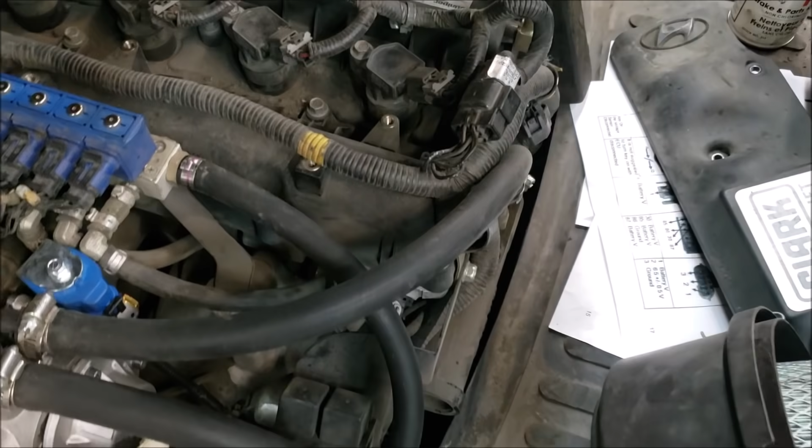Okay, we got a Clark with the Hyundai engine, 2.4, I think, and it has a Juniper system. Problem is, it's rough when it's running. Let me start it up. Sometimes it's hard to start. Okay, now you can hear it. It's hunting.

As you can see, somebody already replaced this. From what I gather, they said it wouldn't even start the first time. They replaced it, and now it's running like this. See, you rev it up, it has a bit of hesitation, it's almost about to die. Alright, so we're going to be checking that.

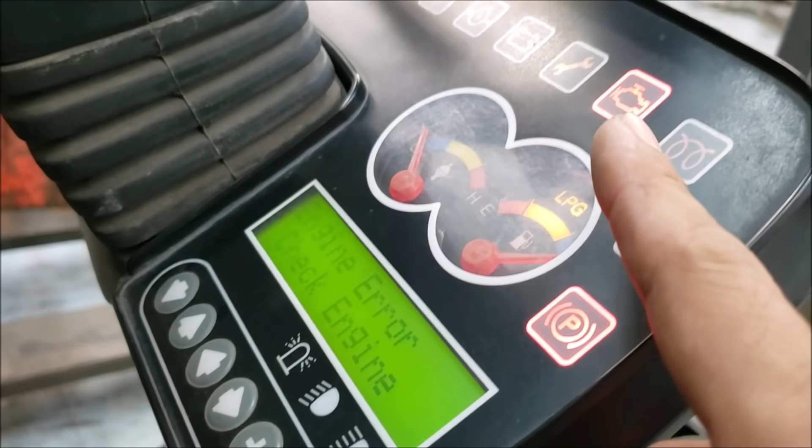We have the check engine light on. Alright, I already got the code from it. I will show you later how to get the code from this type of system. But the code that I got was 0087 and 0192, both pertaining to the pressure sensor for the rail. So what we're gonna do right now is check the response of the rail pressure sensor. We know we got propane coming in, and the injectors are working, at least, because it starts. Whether they're working good or not is still a question, but we are starting with the rail pressure sensor because that is the code that we got.

Okay, so before we do some actual testing on the sensor, let's try to understand what the code means and how the sensor works. Two codes were present: 0087 and 0192. 87 is a fuel rail system pressure too low, and 0192 is the pressure sensor circuit low.

For the threshold for 0087, once the pressure drops to 1700 millibars or lower, that DTC will be set. Now 0192 is when the voltage received by the ECM from that sensor has gone too low, then that DTC will be set. What's important to notice is the default strategy for the ECM when it encounters a P0192 - as you can see, the default is to assume a value of 1700 millibars. Now, of course, this is not going to be adequate for every scenario, and that's why I think we are having a problem at a snap throttle.

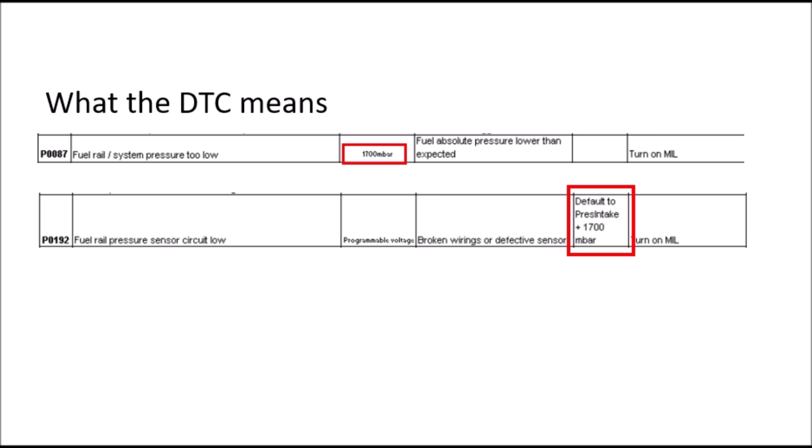Okay, so up next, we're going to be looking at the pressure sensor itself and how it works. So this is the sensor that was used in the fuel rail. It's a Sensata sensor that incorporates a pressure sensor and also a temperature sensor, but we would only be talking about the pressure sensor inside. This sensor is a 150 psi absolute pressure transducer sensor.

The output is ratiometric from 0.5 to 4.5 volts. This sensor is meant to read 0.5 volts at a pressure of 10 psi absolute, and 4.5 volts at 150 psi absolute. Now, from the book for this truck, the specification says it should be 1800 millibars minimum at key on, so that would roughly be 26.1 psi absolute, or using the graph, the voltage would be approximately between 0.8 to 0.9 volts at key on.

And then of course at a higher RPM, it's supposed to follow the pressure sensor reading from the map sensor. So at a higher load, that voltage or pressure reading should increase from that sensor.

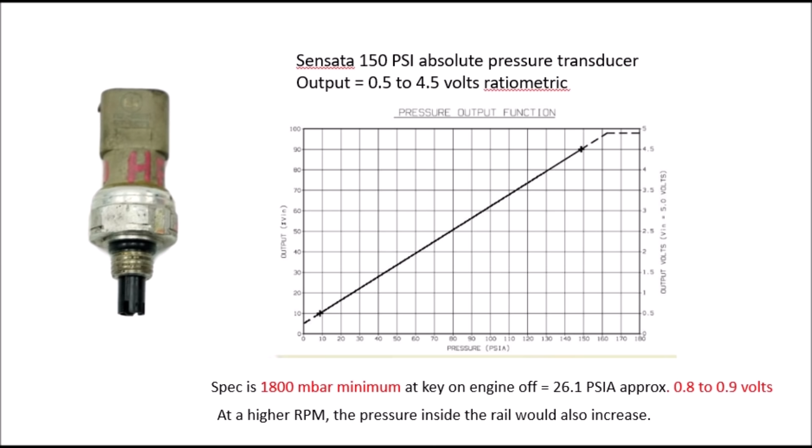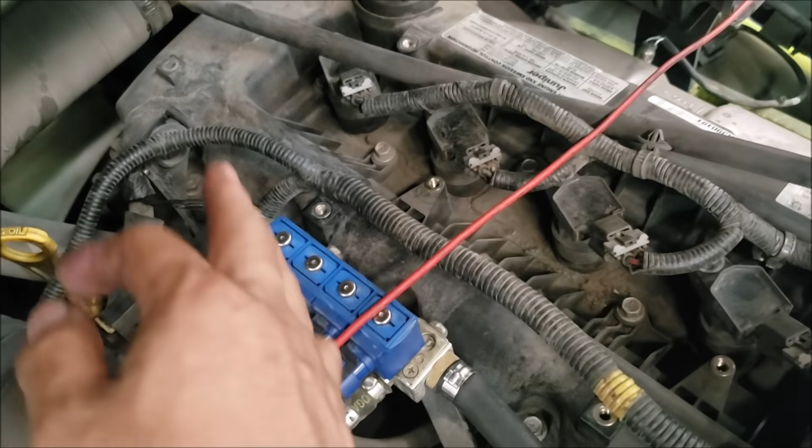Okay, so I have my channel B hooked up to the signal in from the pressure sensor. I wanted to pin it on the computer side. So I know the pressure sensor is here, but I'd rather take it from the computer, so I know it's reaching the computer. It's easy enough to get at it anyway, it's just on the back of that panel.

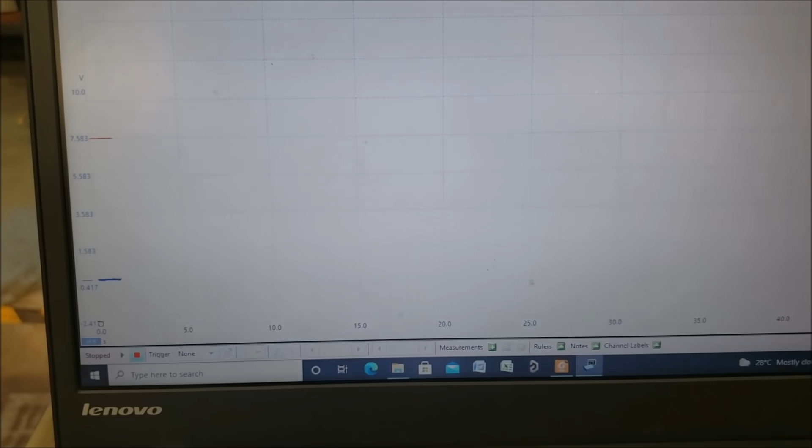Alright, and then my channel A is hooked up to my map sensor, which is right here in the manifold. Right now, channel A, channel B is already set up. So I have it set up at 5 seconds per division. It's a slow signal anyway. So let's try to run this. Okay, it's running. Let's crank it.

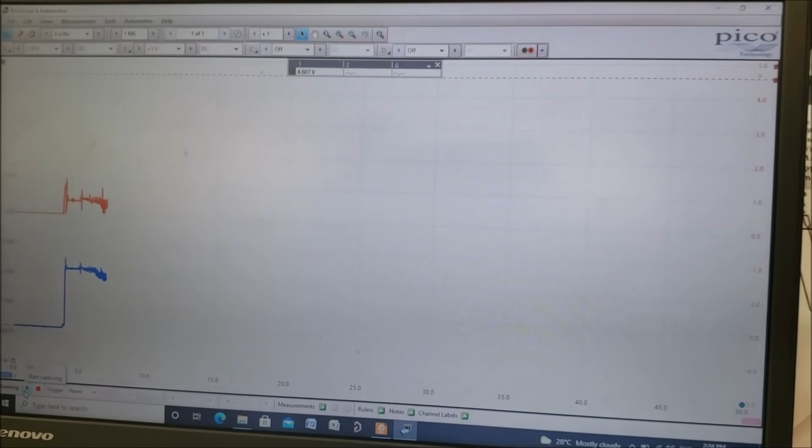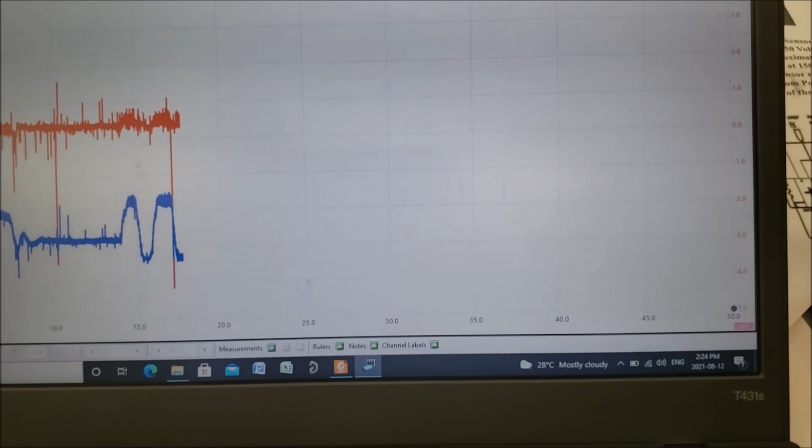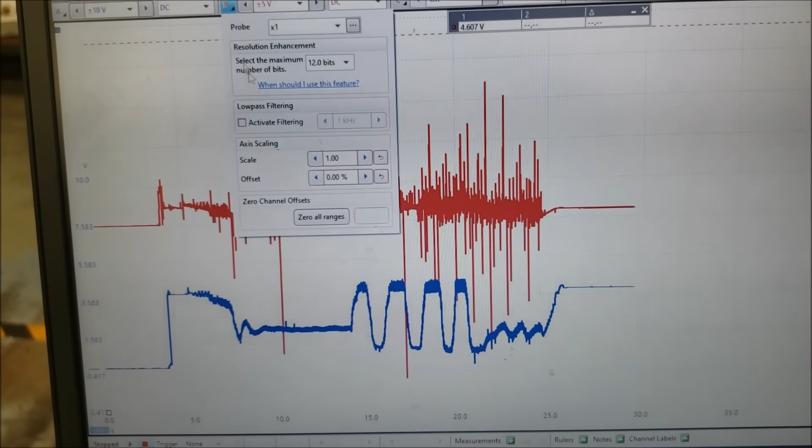Yeah, that was rough. Okay, and we're going to key off. Stop the capture, and we're gonna clean it up a bit. I'm gonna put in our filters here just to clean it up a bit so you can see that signal a bit better.

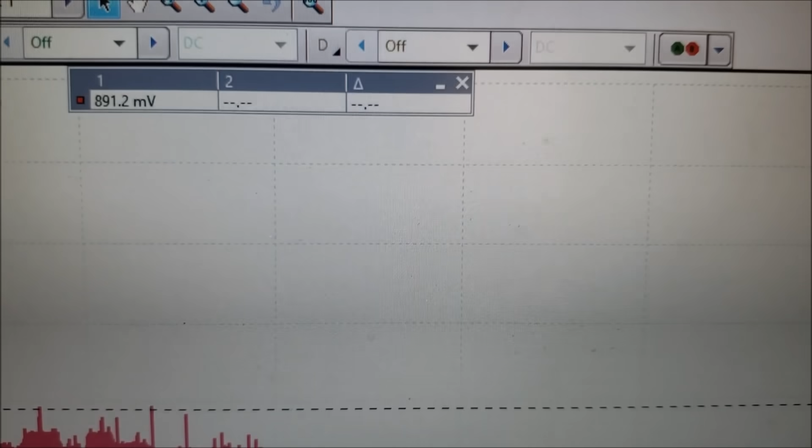So as you can see, at the moment of key on, let's bring down this. At the moment of key on, the reading was close to 0.96, somewhere not like 0.89, which is close to the specs in the book. But after a brief moment, it went down to about 453, which is already lower than the specs.

And then once we cranked it and started it, it never went above that. It does follow, but it never went to the proper readings. All right, so I know the wiring is good because it's reaching the computer. We know that the power is good, already checked it. Powers and grounds, already checked that, it's good.

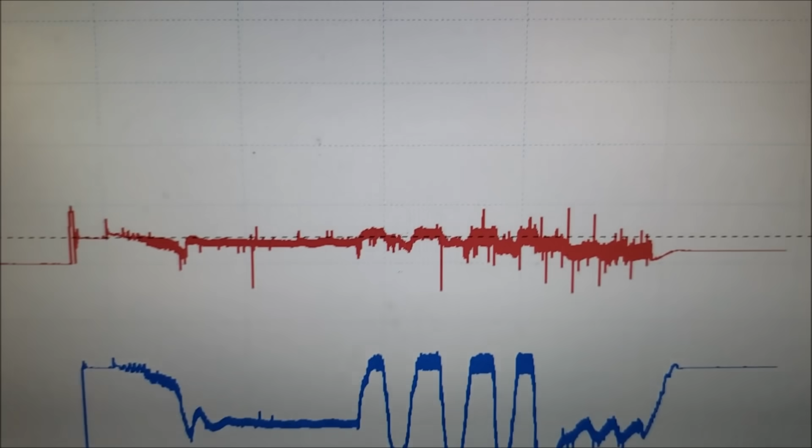So to me, it's looking like it is a pressure sensor. It's not reading right. Looking at this, if nobody replaced it with a brand new regulator, then I would be thinking, okay, maybe the regulator is not supplying enough pressure or is not regulating properly. But at this point, it's brand new, so I'm gonna think that it is doing its job. So we have fuel, but basically not enough, maybe.

But I am gonna try to replace that sensor and see what happens. I don't think it's gonna be in the fuel rail, I don't think it's gonna be the injectors. Basing on how it was responding to that surge of pressure and then ultimately just dropping down right away - if it was a leak, maybe a leak in the injector or whatever that's dropping the pressure, you wouldn't see a drop that is right away. It's steady and then drops right away at that instant.

I would think more that if there was a leak somewhere here or outside, then it would be a slow drop in the readings of that sensor. That's why I'm thinking more that it's going to be that pressure sensor that is at fault here.

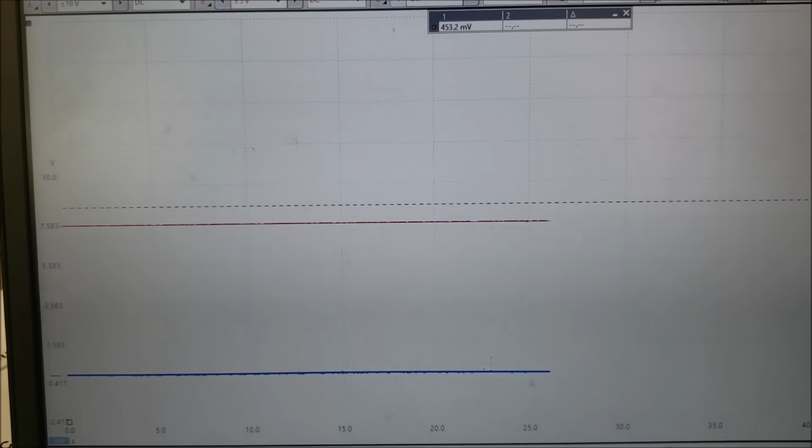Okay, so got the new sensor in. That was the old sensor. All right, new sensor in. The oscilloscope is hooked up the same way. All right, it's already running. Let me stop this for a sec so we can go back to the first one. Okay, same setup. Okay, let's try to key on first.

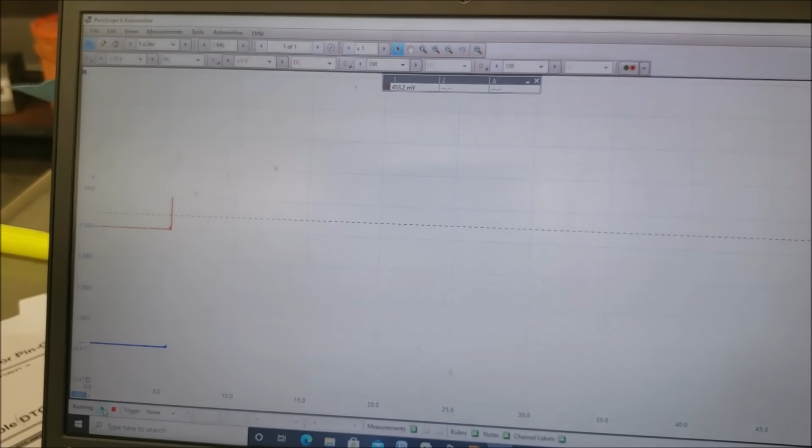Okay, so that's a big difference off the bat. So right now at key on, just a key on, see, it's holding steady. It's at 1.3414 something, so that's good.

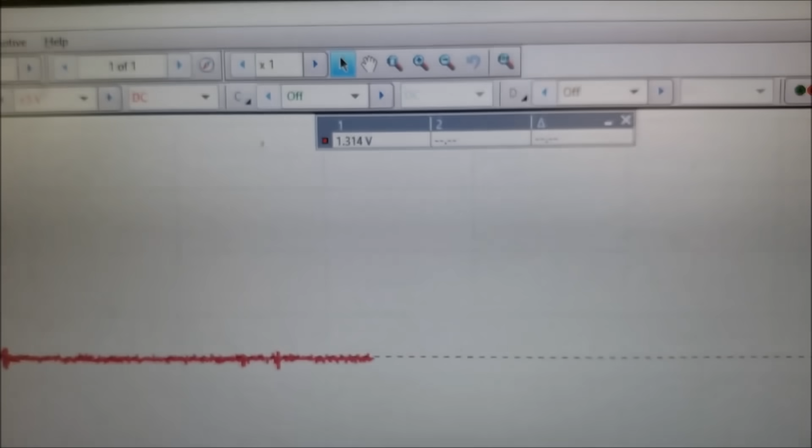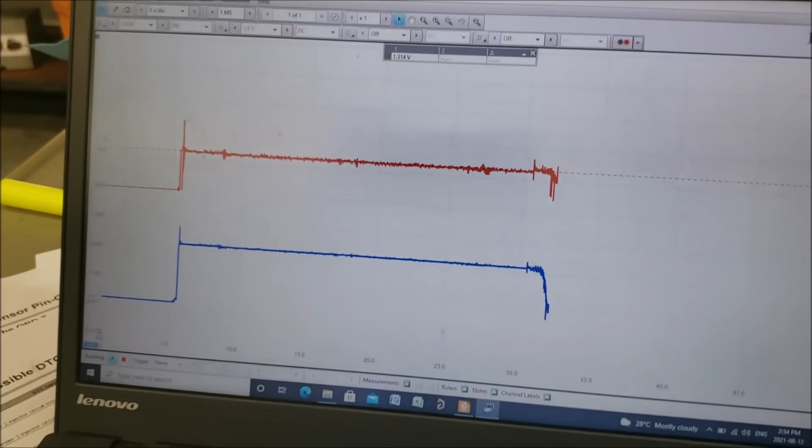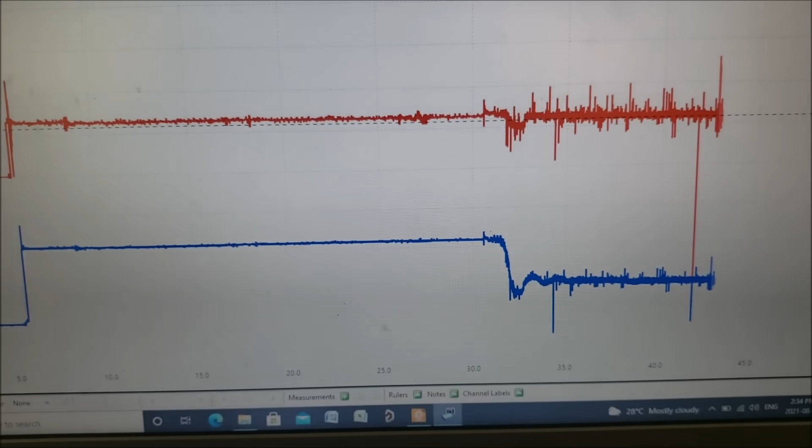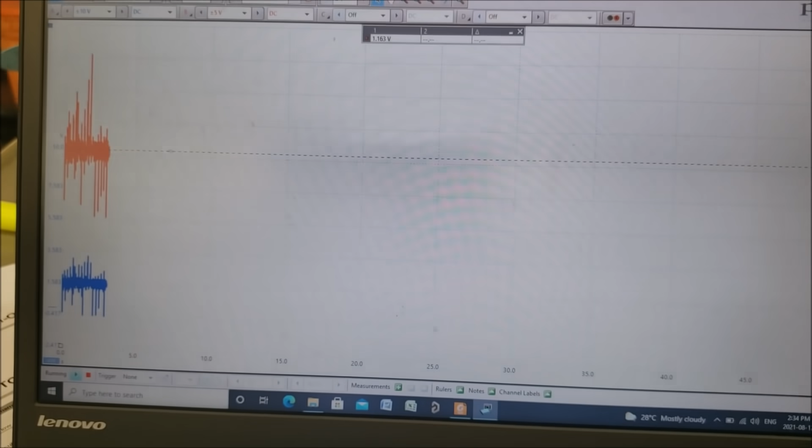So let's try to run it. Cranking. Okay, started it right away, a bit of a drop. Right, let's try to rev it up a couple times. We heard it before with the old sensor, there was a lot of hesitation when you snap it, so let's try to look at it right now.

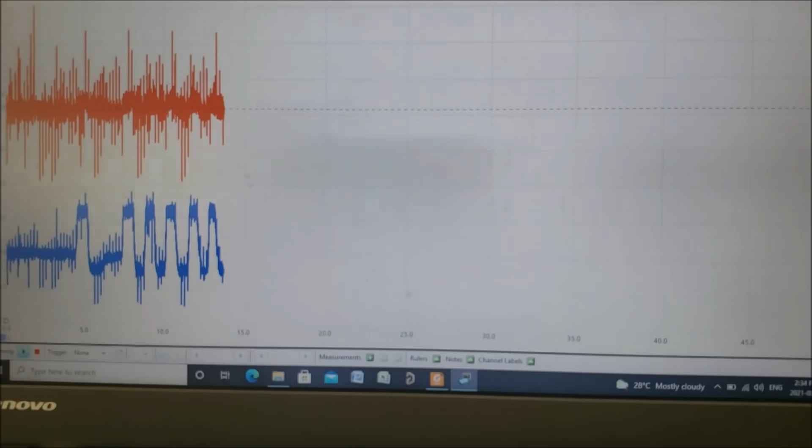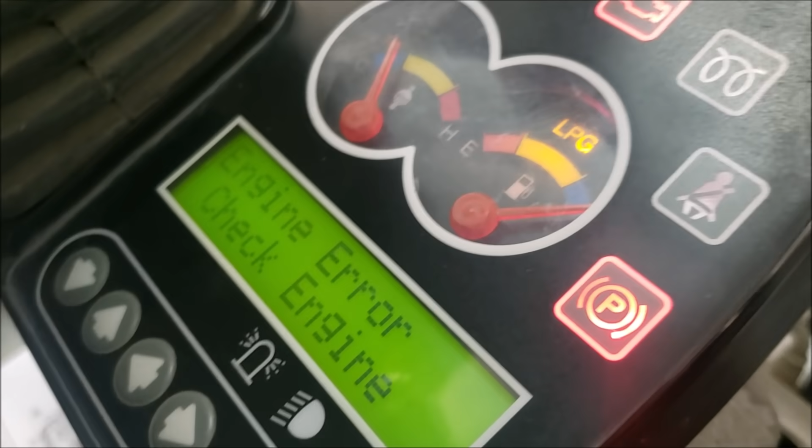Of course, check engine light still there, we still need to clear it after. All right, but I think we're pretty much good on this one with a new sensor.

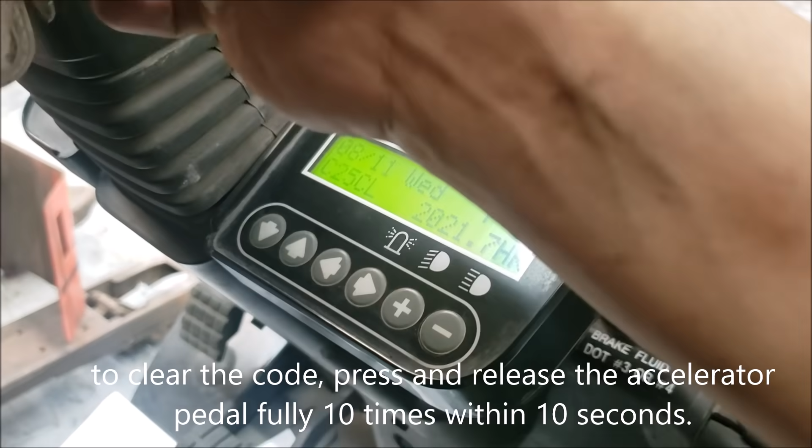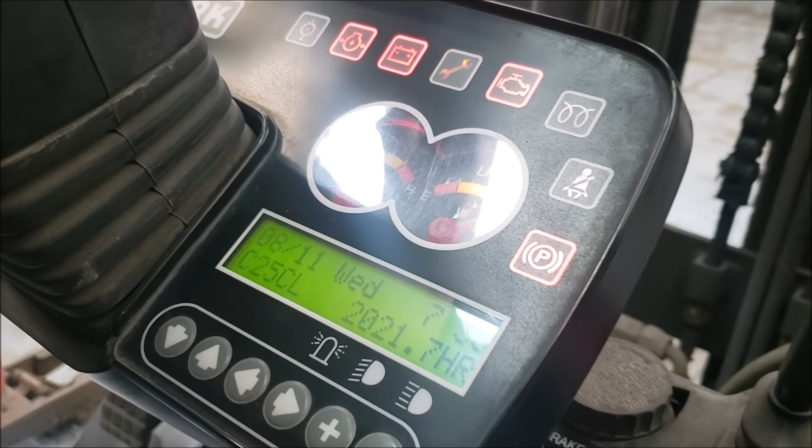I'm gonna stop the capture for now. Let's try to take away the code, clear the code. So key on. Okay, do that again. Okay, 1, 2, 3, 4, 5, 6, 7, 8, 9, 10. Okay, see the check engine light go away, that means it cleared the code. Let's try to crank this now.

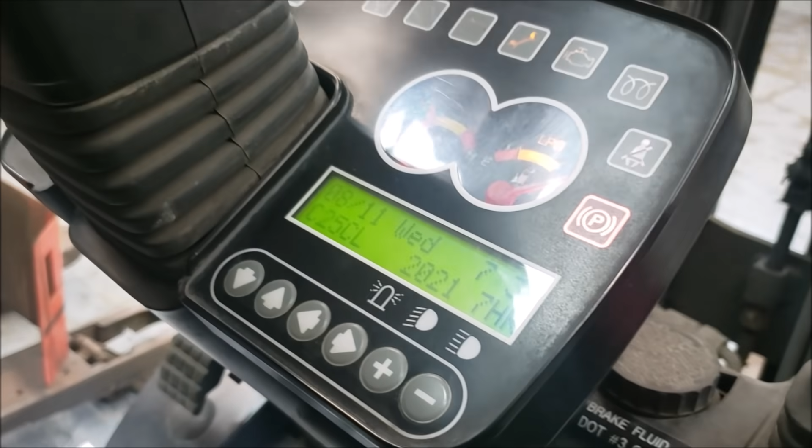Okay, so code is gone. All right, because at key on, you already seen the right pressure. All right, so right now we can call this one a fix.